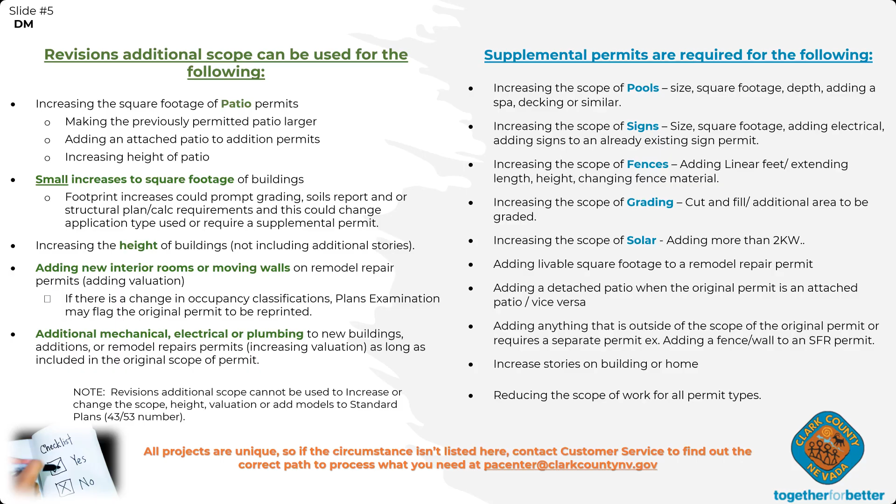Supplemental permits that are related to a permit cannot be reviewed and approved as a revision. Supplemental permits are submitted through the Citizens Access Portal like all other building permits and will receive a new building permit number. Supplemental permits must include the original building permit number and the scope of work.

Example: supplemental to BDXX to add linear footage to the block wall. This assists with assigning these supplemental permits to the original plan reviewer, and it also links this supplemental permit to your original building permit.

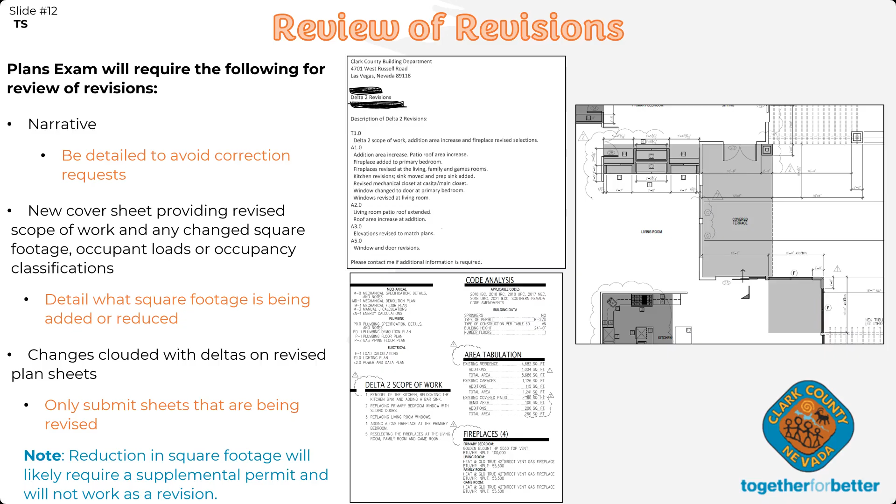Also note that mechanical, plumbing, or electrical plans may not be added as a revision to a previously issued permit that did not include those disciplines. Please contact building corrections to add those disciplines that were never there, at clarkcountynv.gov, for information regarding adding them where the original permit did not include those disciplines.

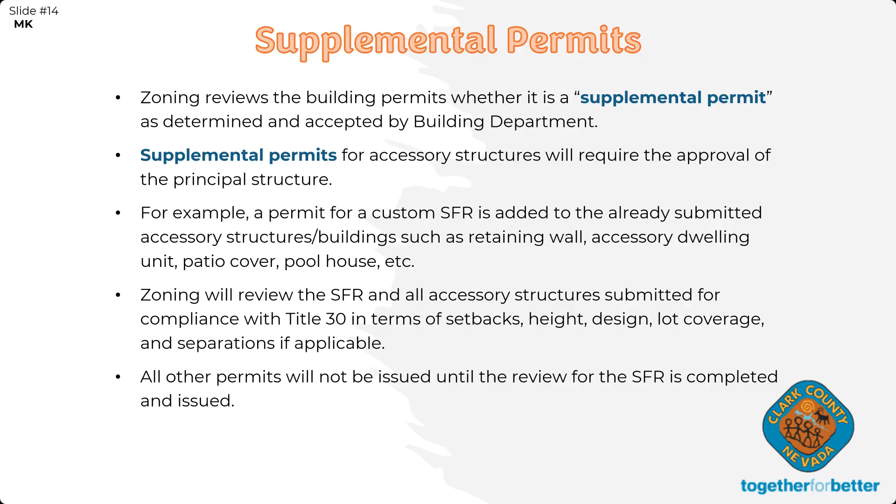Next slide. If the prior permits had approved land use, the revisions or supplemental permits may require additional land use. Sometimes people add something and find there was an original land use requirement. It may require you to go back to current planning to talk about those additions or supplemental permits, so make sure you talk to your examiner to confirm compliance.

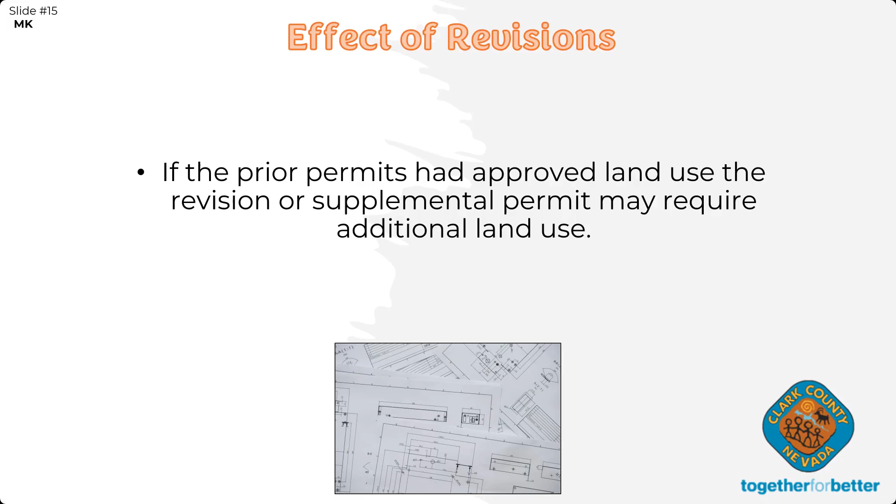And last, if you have questions, we are always here to help you. Our main email is cpzoning@planscheck@county.nv.gov. We'll be happy to help you. Thank you, Maria.

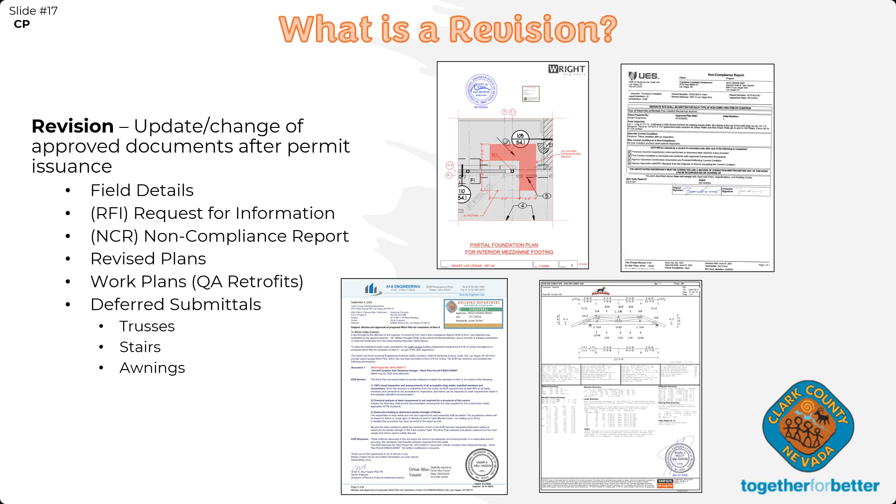So what is not a revision? This is some of the most common documents that we get: concrete mix designs, final QA reports, grading reports, structural observations, and geotechnical observations.

So we have another team within the engineering group, which is the quality assurance team, and they are the ones that review these documents. All of these documents have to be uploaded as an inspection document. These are inspections, they're not plan review. So these are some of the most common documents we get as revisions, but they are not.

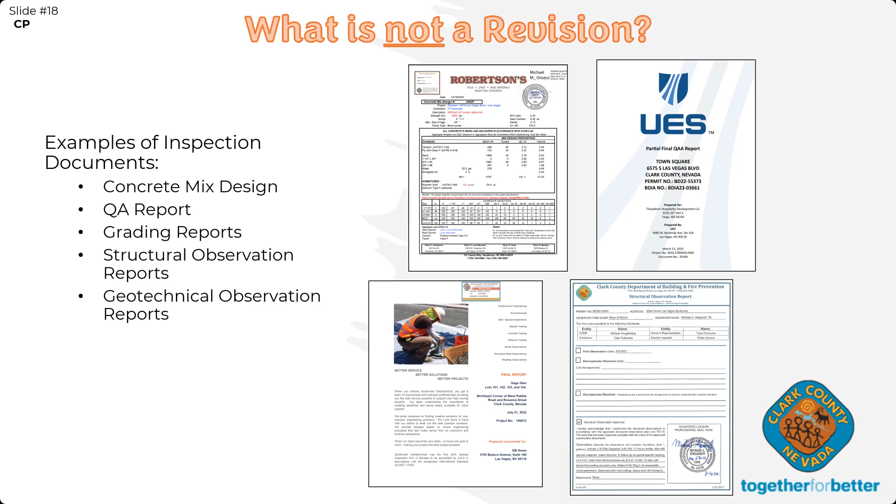So what do we expect to see on a revision? Well, definitely, we need it to be stamped by your design professional, either the geotechnical or the structural engineer. A narrative of that revision will truly help. When engineers bubble the areas that they're reviewing or use red or a different color to address what they are trying to review, it truly increases the chances of your revision being reviewed faster. And that's the reason why we ask for this narrative as a cover letter.

Anything giving us information about a structural change or geotechnical change, please upload it as a structural calculation. I know it doesn't make sense to you, but I won't see it. My peers on the geotechnical side won't see it unless you upload it as a geotechnical calculation or a geotechnical or soils report, depending on who you are trying to address.

So we need the narrative, we need the engineer's electronic stamp. This is not a requirement from the building department, this is a requirement from the Nevada Board of Engineers. So we just comply with their guidelines, and the link has been shared on the slide as well. The deferred submittals, any shop drawing used as a design drawing, is still requiring an EOR stamp or review depending on the type of project.

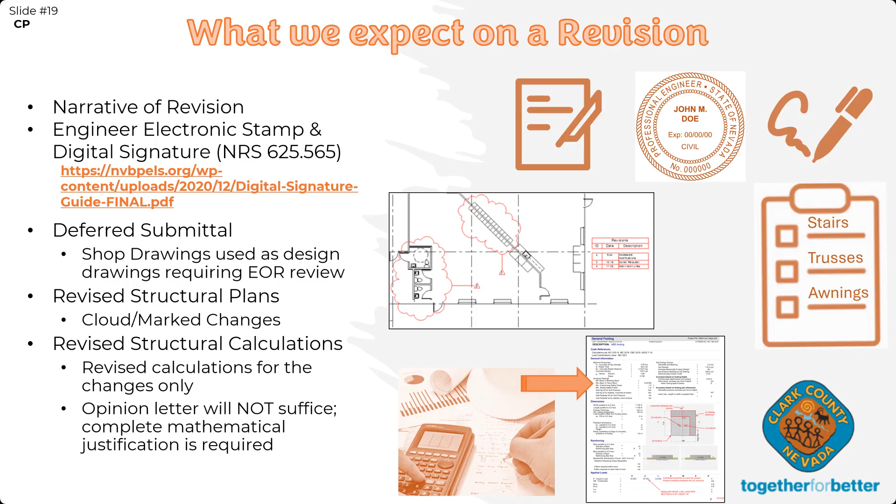As Tarek was mentioning on his slides, just submit what is pertinent to the revision that you're trying to have us take a look at. Opinion letters will not suffice; complete mathematical justifications are required. So we have a lot of engineers that submit just something that says, yeah, that new footing, increase size, that's fine—we are not gonna be reviewing and approving those types of documents. If the engineer in any way wants to change that design, he's gonna need to provide a justification for that change, and the justification needs to come in mathematical calculations, either by hand or by software.

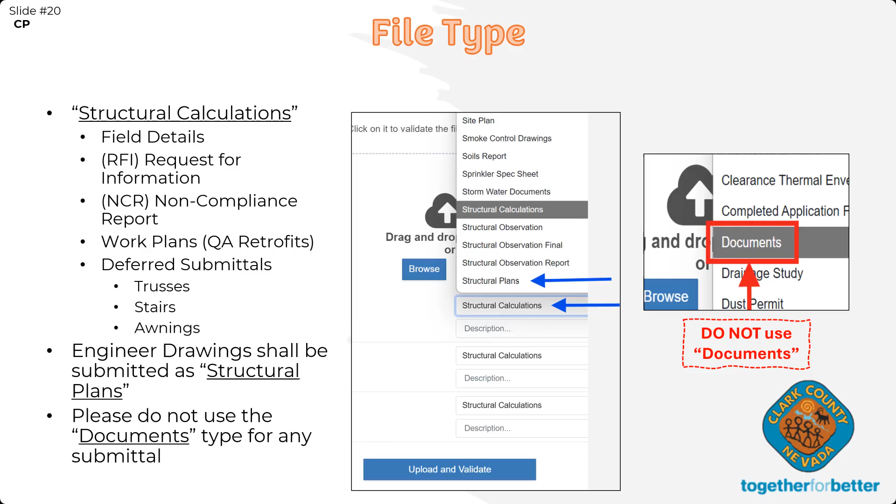The file type, one more time, as I was mentioning before: anything addressing structural comments or structural changes, please upload it as structural calculations. If for some reason you have a letter addressing structural, geotechnical, and mechanical, feel free to upload it twice. That way, I can review the structural part for our side first. Do not use the documents file type for structural nor geotechnical revisions because we won't be able to see those documents. The engineer drawings shall be submitted as structural plans. I think all of you are familiar with that by now. Once more, please do not use the documents type for any structural or geotechnical submittal.

Next, supplemental permits. Basically, this is something that was probably caught by our plan submittal team, or at the time you submitted the revision that became a supplemental later. If for some reason that drastic scope change was not caught per slide 5, under some of the changes and revisions that Dana mentioned as a scope revision, then the plan reviewer most likely will catch it. If we catch it, we're going to contact management and ask if this is still a revision or if this is a supplemental permit. If it's a supplemental permit, most likely we will issue a comment in the plan room. If you see that type of comment, either from the geotechnical side or from the structural side, you are welcome to contact us at any time.

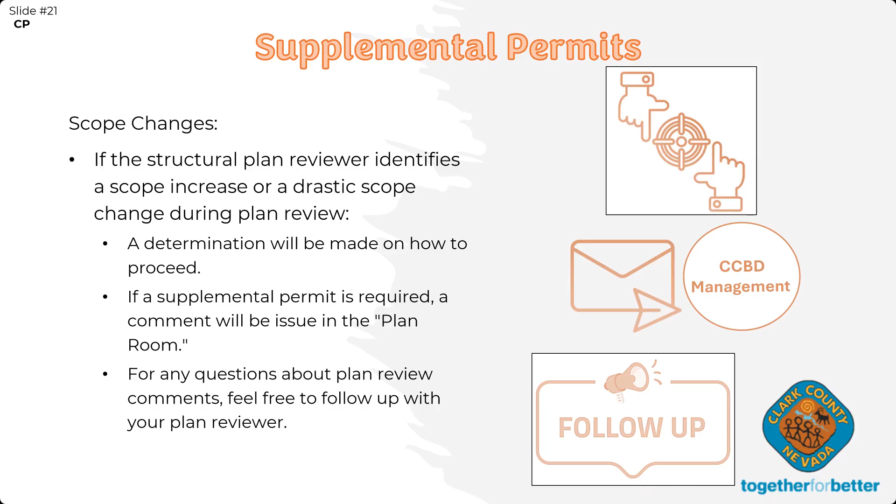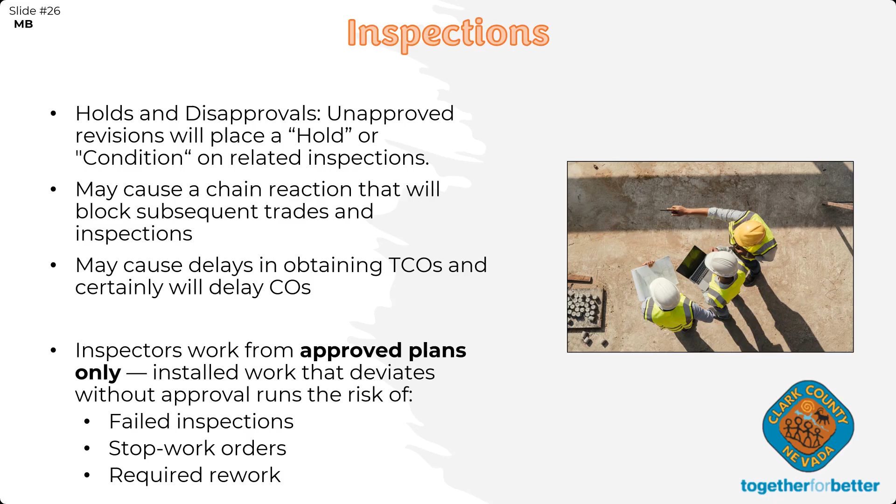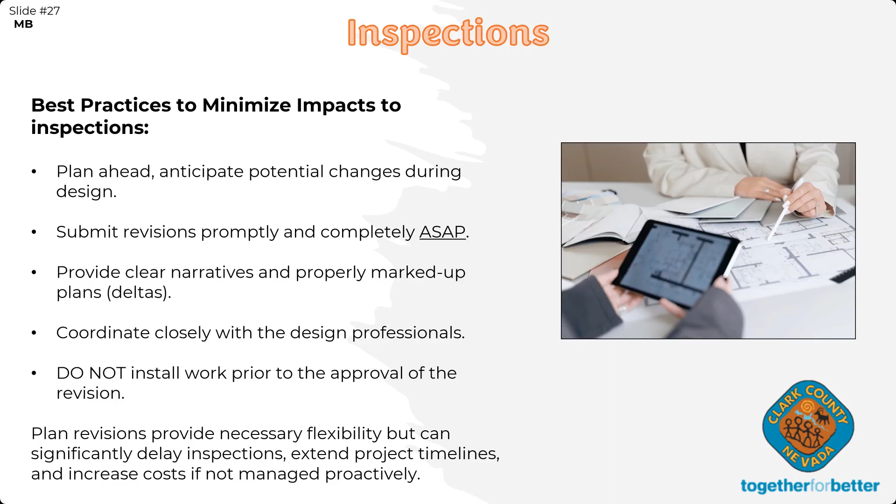Some best practices to minimize these impacts to your inspections: plan ahead, anticipate potential changes during the design, submit the revisions promptly and completely as soon as possible, provide clear narratives and mark up the plans, and coordinate closely with the design professionals. Please don't install the work until the approval of the revision. Plan revisions provide necessary flexibility, but they can significantly delay your inspections, extend the project timelines, and increase costs if not managed proactively.

I just wanted to reiterate that if you had an original permit but you're adding something, that's not a revision, that's a supplemental permit. And if you do have a supplemental permit and an original permit, schedule inspections on both of those permits. They work in concert with each other, and they live throughout the life of the project. Just because you have a supplemental permit, the original one doesn't go away, so make sure you get inspections and finals on both permits.

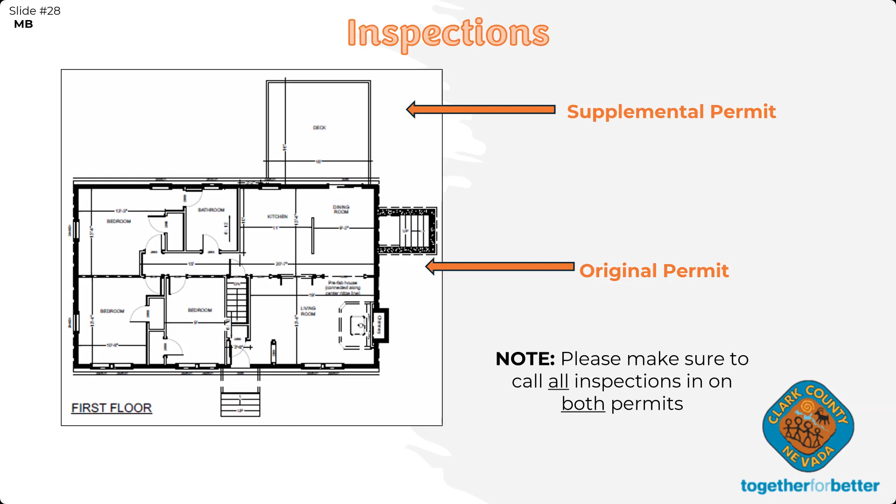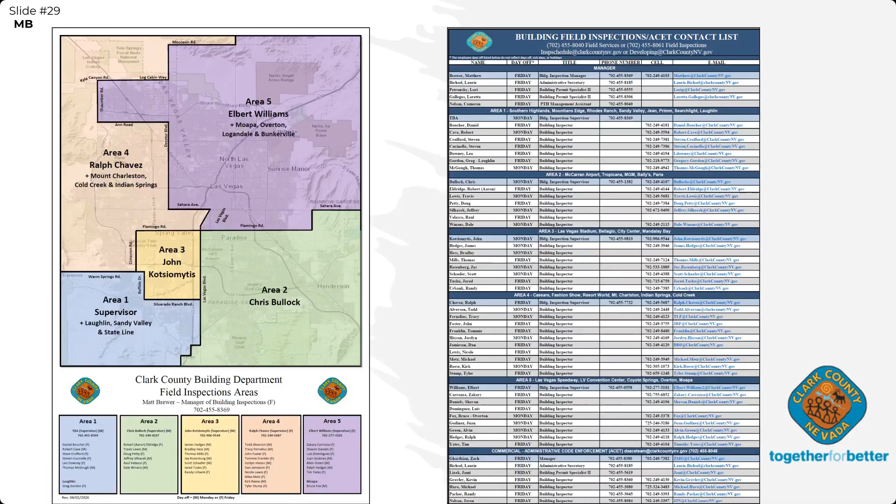If you have any questions, you can contact us. On our website there's an area map that shows the supervisors and inspection personnel assigned to the areas, along with our contact information. If you have any questions, don't hesitate to call us. That's our field services counter, and you can always call to schedule or ask questions of the field services staff. And that's it, thank you.